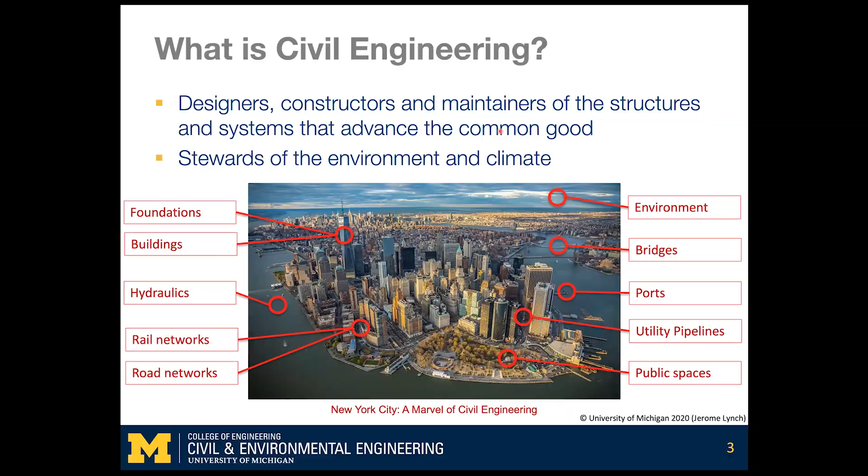Now, the notion of the civil engineer really finds its historical origins in continental Europe in the mid-1700s in the Kingdom of France. During that time period in the history of France, there was a rapid expansion of the national economy, requiring the king to install and invest heavily in transportation assets throughout the kingdom, including rising investments from 1726.

All the way to the eve of the French Revolution in 1789, going from 2 million livres to 25, constructing essentially new masonry bridges, paved roads, among others.

But it's really not until 1747 that we see the establishment of the first school that's designed to train individuals to be civil engineers, specifically engineers in the pursuit of transportation assets, with the establishment of the National School for Bridges and Roads. In the second half of the 18th century, we see the momentum shift to Great Britain.

Where we see the first self-described civil engineer, John Smeaton, who established in 1771 the Smeaton Society of Civil Engineers. That momentum continued into the early 1800s with the establishment of the Institution of Civil Engineers, which was formed in 1818 as the first professional engineering society and actually the first global professional engineering society, with many countries then following the leadership of the ICE.

The ICE really grew under the leadership of Thomas Telford through the 1820s. Now, if we look at the impact that civil engineers have had over the history of all of our nations, we'll see tremendous economic impact in much of our work.

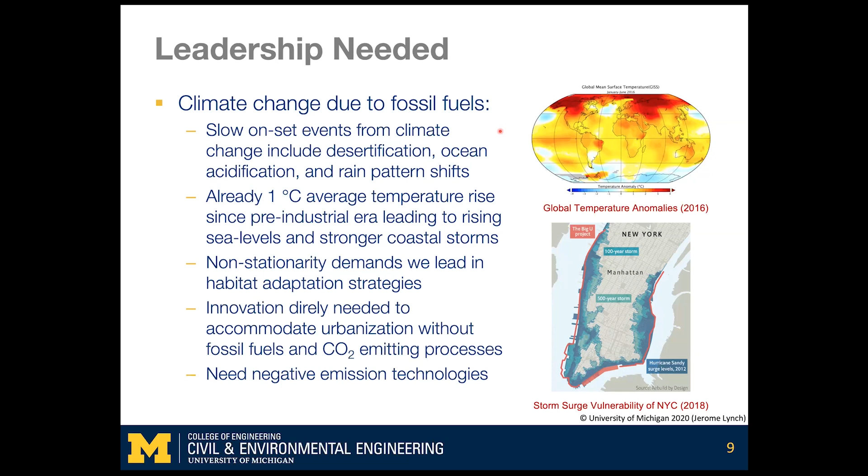We're also likely to play a role in negative emission technologies that will begin to essentially remove carbon from our atmosphere. Another area where leadership is needed is the financial burden of our infrastructure, which continues to grow.

There's also questions around the role of public investment. Currently, public investment, particularly in North America, remains a dominant investment model for funding our infrastructure, but does that remain the best approach? If we were to introduce more private investment in our infrastructure, does that ensure equitable access to the benefits that our infrastructure design provides?

And there's many examples that we see across North America of privatization of infrastructure services associated with private financing behind infrastructure projects. Now, a question must be asked: given these grand challenges, are we positioned as a profession to lead?

One of the challenges that we see going forward is a global commoditization of the profession, leading to tighter profit margins, which adds challenges associated with finding qualified candidates and retaining those candidates within our organizations. Now, while market consolidation of the industry is helping with efficiencies and talent access, one of the challenges we see is a lack of funding in new technologies across the industry.

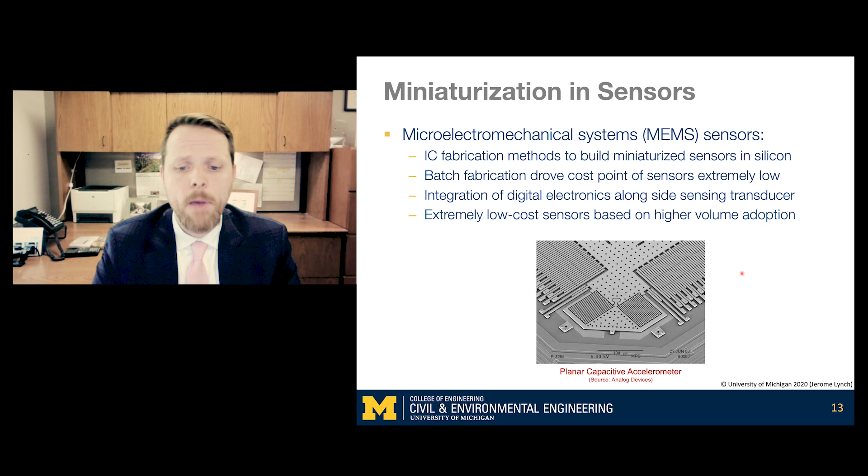One of the first amazing technologies of the 20th century is the miniaturization of sensors, making sensors both miniature as well as low cost. Some of the key technology drivers there that have really driven a new era of sensing technologies is microelectromechanical systems, or MEMS sensors. We see many of these sensors throughout many forms of life, including our cell phones, all the way to infrastructure systems. These technologies have put into reach high density of sensing that we're now beginning to see throughout the built environment.

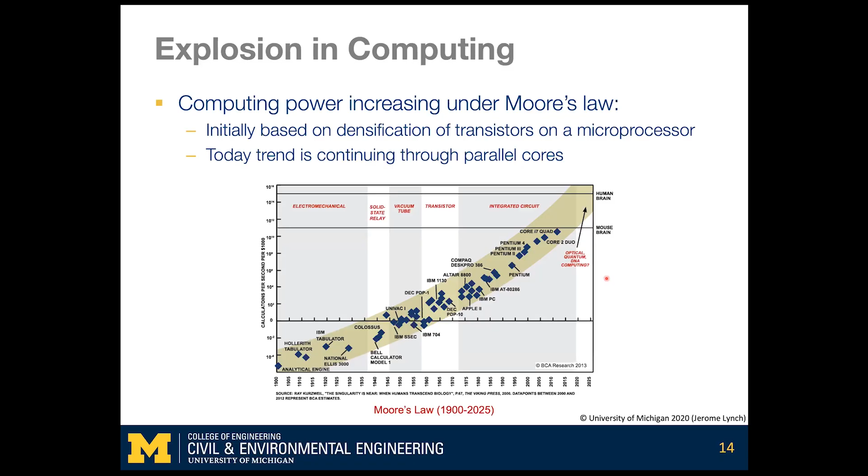Another key technology development is computing power, which has continued to increase under Moore's law. Initially it was based on densification of transistors on a microprocessor, but today that trend continues through the introduction of parallelization within the design of our computational cores.

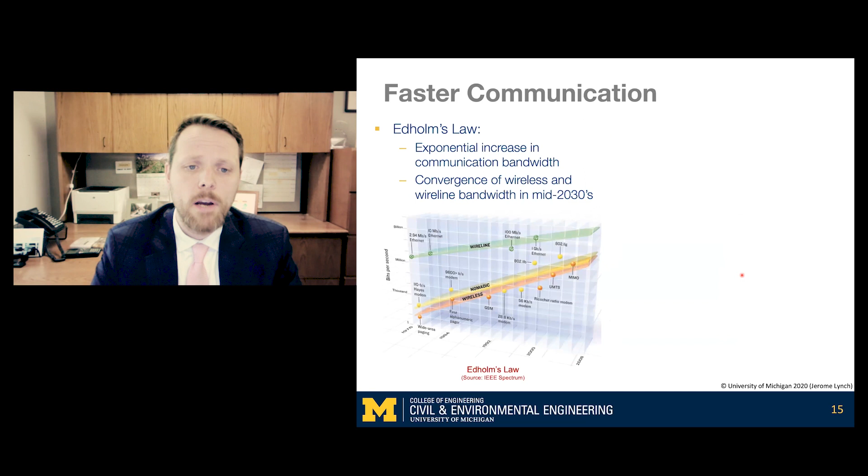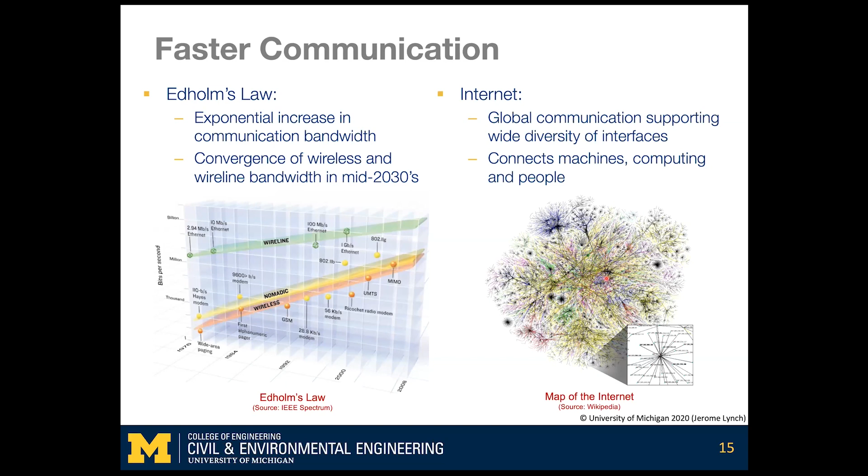We've also seen an explosion in communication technologies, both in the form of Edholm's law, looking at the rapid rate of communication bandwidth associated with wireless communication technologies, where we're seeing convergence of wireless and wireline bandwidths converging by the mid-2030s. Also the internet, which is really a massive global scale communication system that allows for communication between people as well as between devices.

Finally, machine learning has emerged as a very powerful analytical approach for contending with the amount of data that we may be collecting from a sensed world.

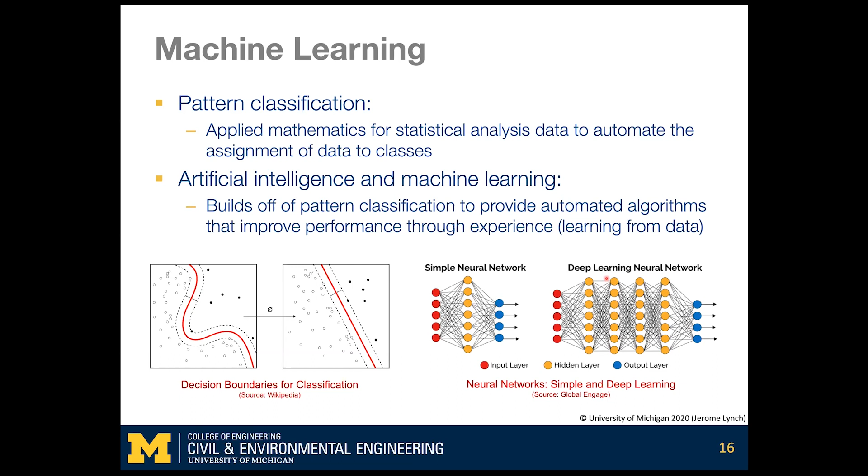First instances of machine learning really find themselves in the field of pattern classification, which is an applied mathematics study of statistical analysis of data to automate the assignment of data to inherent classes, allowing us to classify our world in autonomous ways. That's matured into artificial intelligence and machine learning, which builds off of pattern classification to provide automated algorithms that improve performance through learning, essentially learning from data. There's many examples of that, ranging from artificial neural networks to deep learning convolutional neural networks.

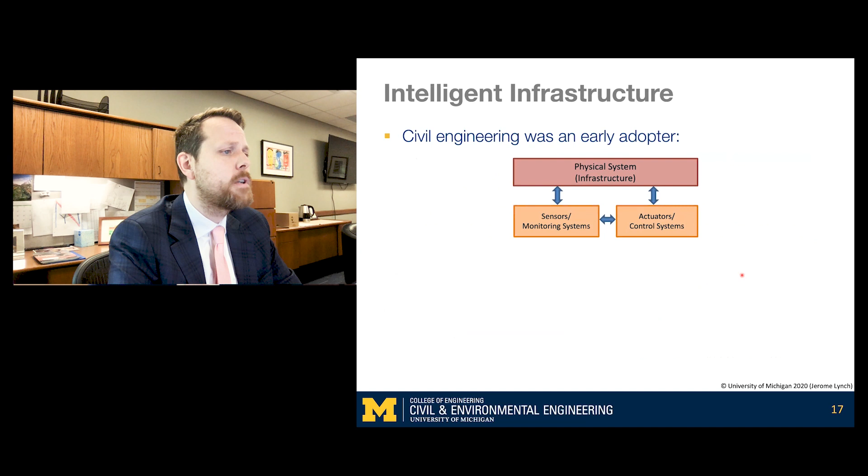Now civil engineering as a profession has always been a technology leader in the adoption of sensing and actuation technologies to automate our infrastructure systems. We see examples of sensors in the form of monitoring systems and actuators in the form of control systems in many civil engineering structures, ranging from marquee structures in areas where natural hazards are concerned, such as our long-span bridges.

On the west coast of the United States, we see permanent seismic monitoring systems, to proactive control systems that can control undesired deflection and motion of structures during seismic and large wind events, such as structures throughout the seismic areas of Asia. You can see examples here from Tokyo of Mori Tower, which has 350 semi-active hydraulic dampers trying to control that structure during moderate strong ground motion and typhoon winds.

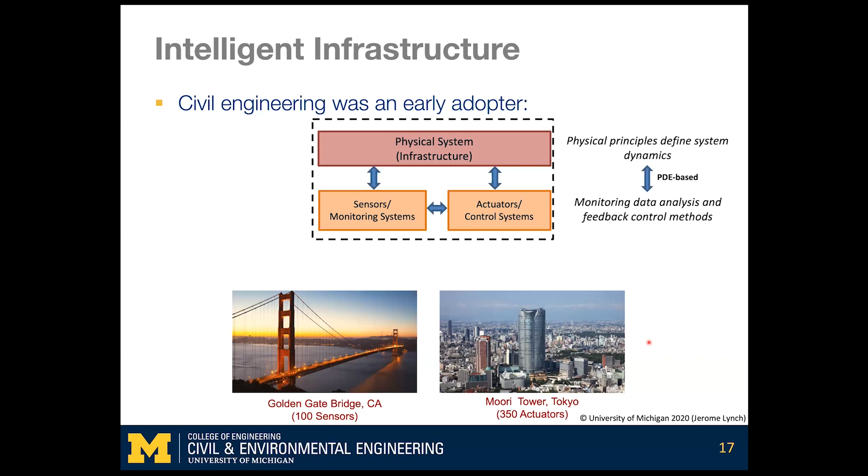But today we're seeing a shift away from the traditional interpretation of data that we may collect in our sensing and actuation systems that have historically been based on partial differential equation type analysis to ones that are based on data-driven methods through the invocation of scalable computing power that's available through the cloud. So communication has made computing on demand available to many of our sensing and control systems, transforming what we can do with data and how that data can enhance the performance of our monitoring and control systems.

This dramatic shift essentially has created a new class of intelligent infrastructure that's often referred to as a cyber-physical system, where the distinguishing characteristic of a cyber-physical system from more traditional intelligent infrastructure is the use of computing power and essentially data-driven analytics to process data we may collect.

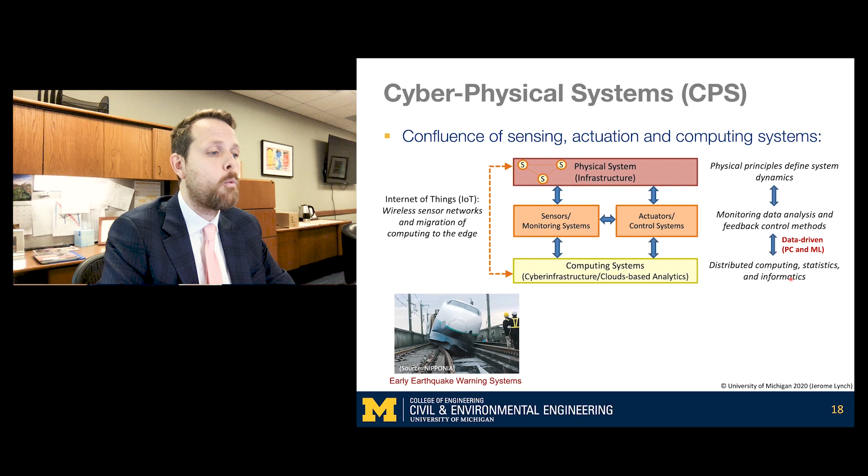There's many examples of these CPS systems throughout our infrastructure systems, including early earthquake warning systems, connected autonomous vehicles, and even the way we inspect our infrastructure through the use of drones and unmanned aerial vehicles that give us access to structures we did not have before.

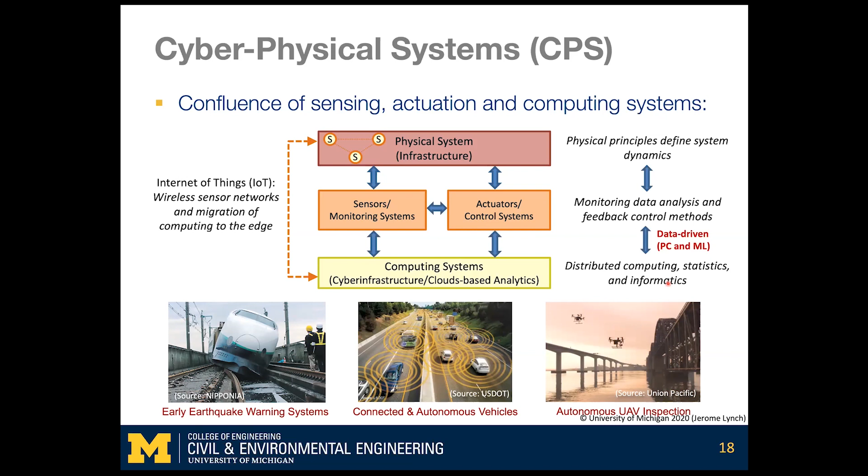Now, the importance of automation cannot be underscored. CPS frameworks are essential for providing solutions for many of the grand challenge problems that I framed at the beginning of the presentation. For example, automation is going to be key in our arsenal of solutions necessary for battling climate change.

Sensing and actuation may be critical to developing adaptive infrastructure systems that truly add resilience to many of our coastal communities. Data-driven assessment based on data collected from CPS systems embedded in our infrastructure will be important in helping us manage aging infrastructure in a risk-informed manner.

Urbanization—we can unlock capacity of many of our built infrastructure systems by enhancing them with cyber-physical system capabilities. We also can increase professional valuation in our talent pipeline by putting automation front and center as a core competency of our profession. But a question must be asked, given the opportunity that these technologies, particularly automation, can play in addressing many of the grand challenge areas that we're being asked to lead,

are we truly in a position of leadership? Let us consider, for example, the area of transportation. Historically, civil engineering has been the designer and manager of our transportation assets and systems. This can include infrastructure assets like bridges and roads, to our signal technologies, all the way to the design and management of our transportation systems, where we look at traffic flow and econometrics.

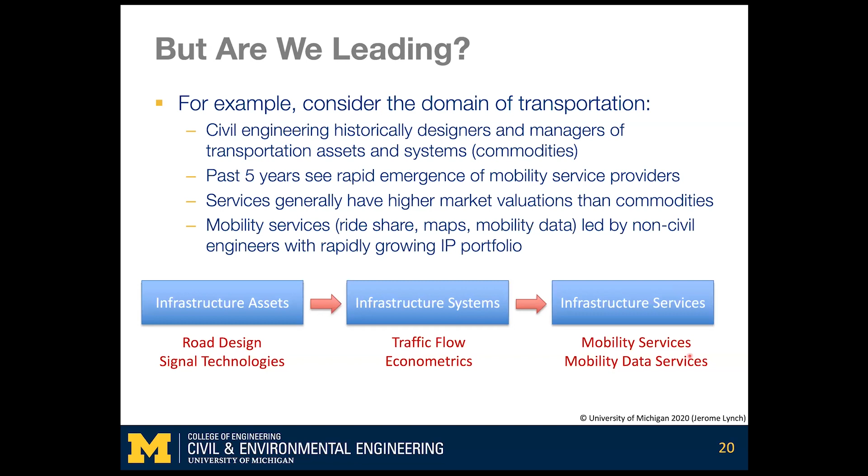Now, these services—including on-demand rideshare, mapping technologies, as well as the collection of data to understand social systems—are generally proven to have higher market valuations than the commodity markets of designing our road assets. So as a profession, we can essentially be more strategic about capturing higher valuation by being the leaders of the infrastructure service space. But one of the challenges we see in infrastructure services is that this particular space is largely being led by individuals with expertise outside of civil engineering.

While these particular businesses have high valuations, they often do not have strong civil engineering leadership at the helm of many of these solution providers. So where do we fit going forward?

So today, infrastructure services are largely being led by the IT sector. They're offering solutions and collecting data, and using and monetizing that data with approaches that often lack transparency. They're also utilizing the data collected by many of these infrastructure services, leading to new forms of private financing for infrastructure projects. And we see that as a dominant financing approach in the smart city space today.

So civil engineering leadership is needed in this space. We need to recognize professionally that it is our domain expertise that's going to extract true value from the data being collected by many of these infrastructure services today.

Not only that, we're uniquely positioned as the engineering profession that really looks at common wealth generation over personal wealth, meaning that we have a role to play in ensuring equitable access to many of these infrastructure services, particularly as we see increasing roles of private financing in this space.

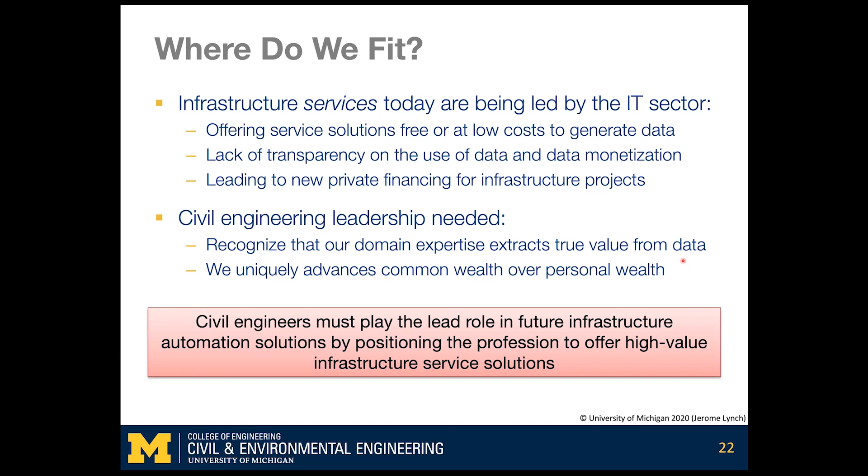In my department at the University of Michigan, the Department of Civil and Environmental Engineering, we've been grappling with many of these issues as an academic community for a number of years, and have recently published a new strategic vision for our department defining what the future role of civil engineers may be in this 21st century. We defined five strategic directions that we truly believe will define our profession going forward.

We feel there's opportunity for us to enhance the experiences of people within our habitats, introducing concepts of social science and public health directly into our portfolio of work.

Also leading in adaptation. While we can hope for mitigation of climate change, I think we have to prepare for that and adapt our habitats to be resilient against climate change.

In order to battle climate change, we have to be thoughtful and innovators in how we shape our resource flows. And we have to leverage new tools and technologies, including automation and smart infrastructure financing, to essentially accelerate the adoption of technologies. So the remainder of my talk today will highlight some of the work we're doing in one of these strategic areas, our automation strategic area, here at the University of Michigan.

The first application I'd like to highlight is one I myself have been involved in, which is looking at the deployment of cyber-physical systems within highway corridors to aggregate data that had not previously been aggregated before, namely data from our infrastructure assets, as well as from the traffic flows that we see on those assets. I'd like to acknowledge collaborators on this work: Kincho Law, Professor of Civil and Environmental Engineering at Stanford, and Dr. Mohammed Ettouney, Principal Emeritus at Thornton Tomasetti, formerly Weidlinger Associates.

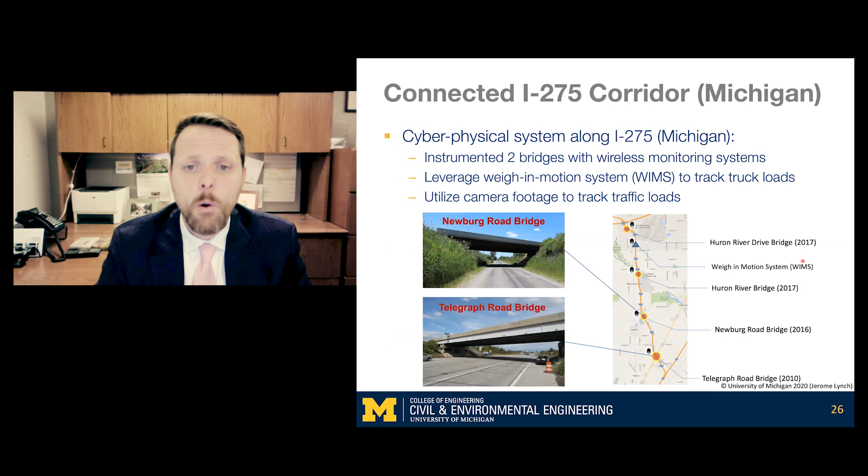We've been designing cyber-physical systems that have been deployed on an operational highway corridor here in the state of Michigan, known as the Interstate 275 corridor, which is a 20-mile corridor from the Michigan-Ohio border at Toledo all the way up to the Detroit metropolitan area.

We've instrumented a number of bridges along this particular corridor with permanent wireless structural health monitoring systems. Two of the bridges that I'll highlight today are the Telegraph Road Bridge and the Newburg Road Bridge.

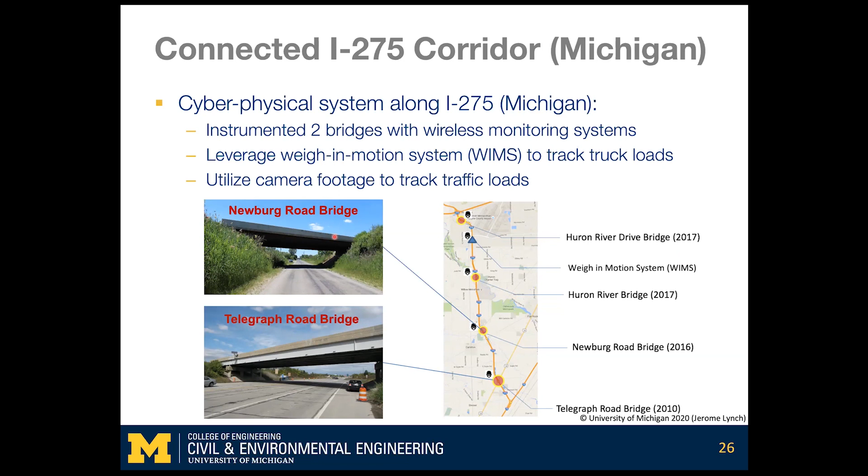We've also integrated into that cyber-physical system traffic cameras to understand traffic loads and weigh-in-motion stations to measure the loads on our infrastructure assets. The two bridges that are instrumented are the Telegraph Road Bridge and the Newburg Road Bridge.

These are 40-year-old bridges. They're very standard steel deck girder bridges that are widely used in the United States. This represents an opportunity for us to look at how to cost-effectively deploy structural health monitoring technologies and cyber-physical systems to manage what is, here in North America, a dominant bridge type within our national inventory of bridges.

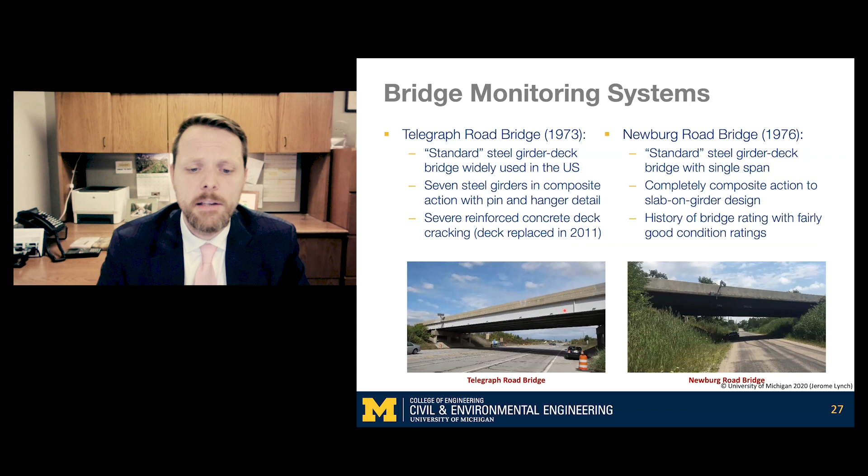Both of these bridges have experienced some form of deterioration over their lifespan, but in particular, the Telegraph Road Bridge had its deck replaced in 2011 due to poor deck conditions, which is not uncommon in these parts of the United States where we have harsh winters and widely use de-icing salts on our roads.

We've deployed on both of these bridges permanent monitoring systems using a network of wireless sensor nodes called Narada sensor nodes. These sensor nodes were developed more than 15 years ago here at the University of Michigan, but have been deployed on more than 24 structures worldwide.

You'll see here two examples of these monitoring systems. These are essentially solar-powered wireless sensor nodes that are deployed on our bridges to collect data from a variety of sensors, ranging from strain gauges all the way to accelerometers and thermocouples.

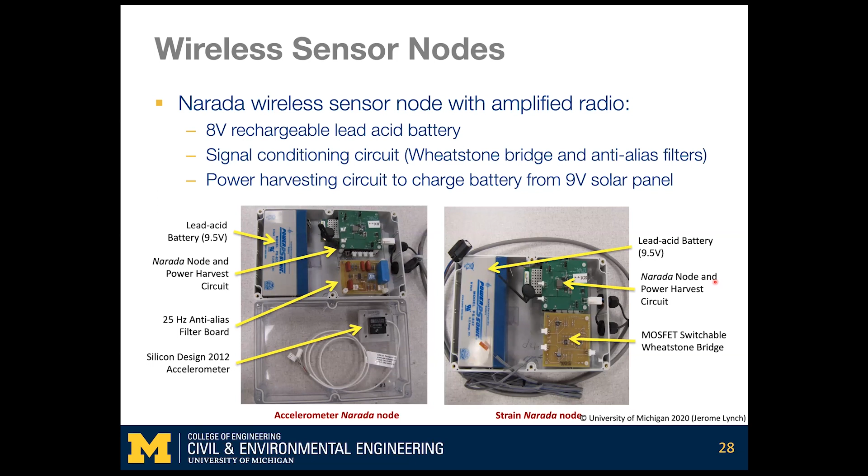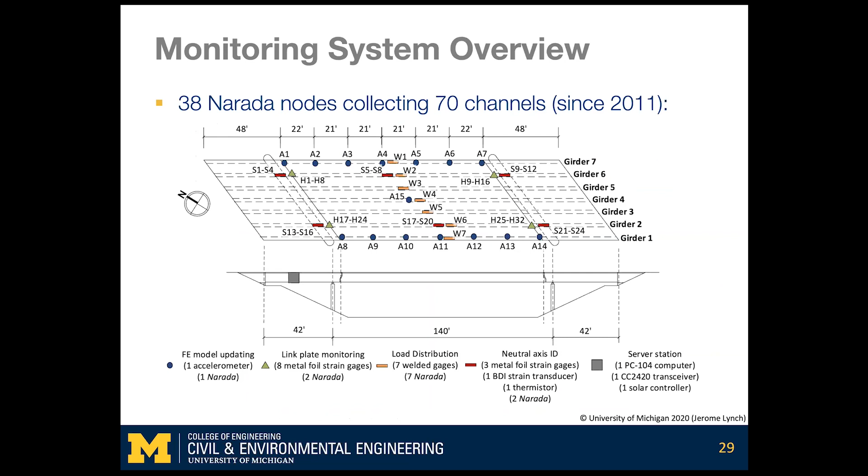On the first bridge, the Telegraph Road Bridge, we have deployed 38 sensor nodes collecting over 70 channels, and we've been collecting data from this bridge since 2011. So we're approaching nearly a decade of performance data that's been collected from this particular bridge nonstop.

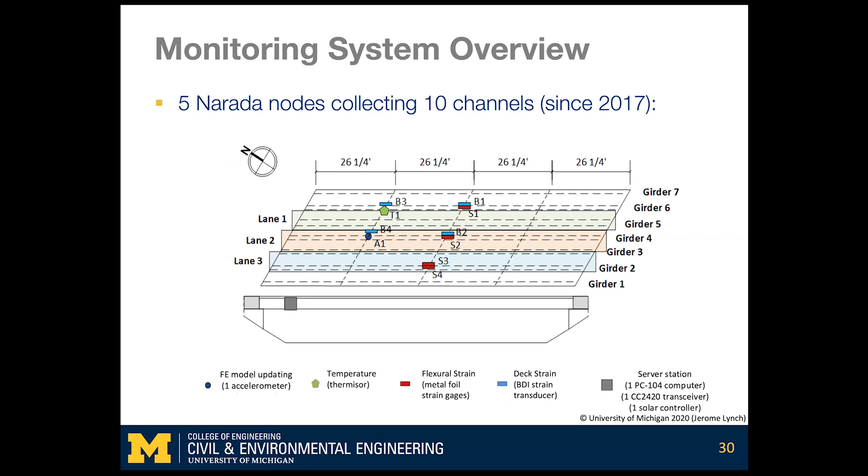Also, the Newburg Road Bridge has a lighter monitoring system on it, with only 10 sensing channels collected by 5 sensing nodes, and this bridge has been monitored since 2017. I'll highlight some of the data from these bridges shortly.

In addition to monitoring the bridges, one of the aims of our cyber-physical system is really to understand what the imposed load is on these particular bridge structures, so that we can correlate bridge responses and long-term deterioration with the actual physical vehicle loads that these bridges are seeing day in, day out.

Towards that end, we have a weigh-in-motion system on that corridor. This is roughly 15 miles north of the Telegraph Road Bridge.

So these weigh-in-motion stations are not co-located with the bridges, but nonetheless provide rich data on the trucks we're seeing in those corridors, including their speed, the number of axles, and the distribution of weights on their axles.

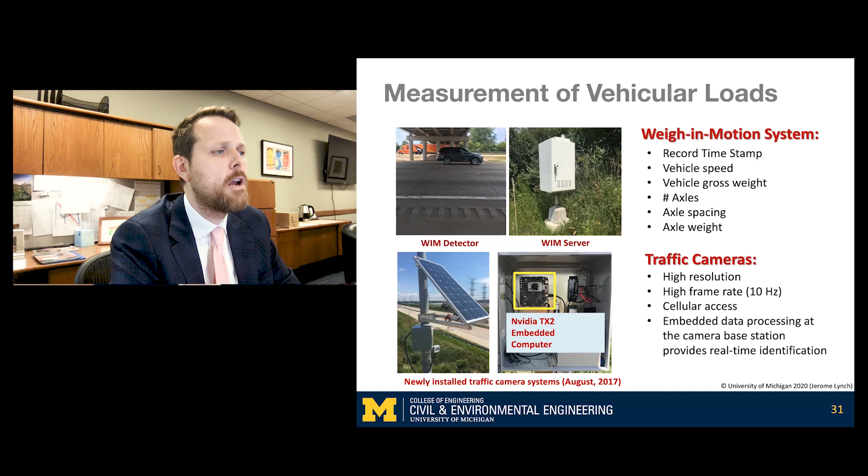In order to combine data from the weigh-in-motion station to the bridges that are further upstream, many miles away, we use computer vision, where we've deployed traffic cameras along the roadside of this corridor to essentially in real time track traffic and then use embedded deep learned detectors to detect trucks and truck events and use our cyber-physical system to communicate those truck events throughout that system.

Now, in the first few years of deployment of these bridge monitoring systems, we largely collected data from these solar-powered sensors on a schedule-based process. So from 2011 to 2016, we scheduled data collection every 4 hours for a few minutes.

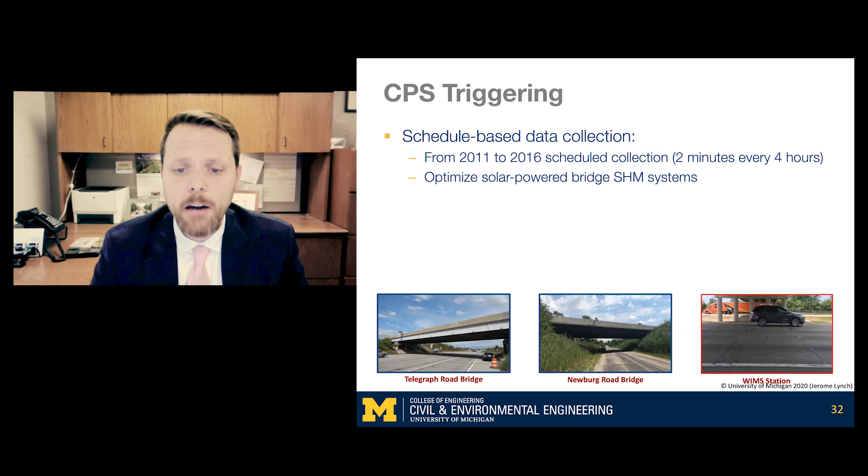If we saw traffic loads on the structure, then we collected the response. But if there was no traffic load, then we would not see measurable behavior of those structures, but we would collect that data. This was necessary to optimize the performance of the monitoring system, which is a solar-powered system. So we do not have unlimited energy, but we need to be very strategic in the deployment of that energy.

Now, the aim, though, is not to just collect data from the response of those bridges, but we're more specifically interested in the response of those bridges to heavy truck loads, which are the known loads to deteriorate those structures. So we use a cyber-physical system and the communication across the internet between our cameras, our bridge monitoring systems, and our weigh-in-motion station to essentially automate the detection of trucks and then to trigger data collection based on the truck events we see moving in the corridor.

In doing so, we can, for the first time, link the actual measured truck load measured at the WIM station with the bridge responses we see down at the bridges and begin to look at correlated relationships between bridge behavior due to the same set of truck loads.

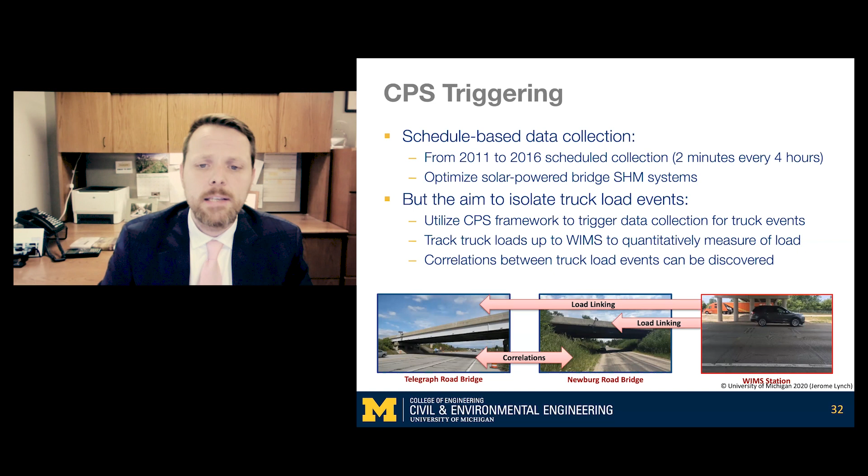In order to do that, we have embedded a number of off-the-shelf computer vision algorithms that are based on deep learning methods. Namely, we have a single-stage detector that's based on a convolutional neural network architecture. It's often referred to as YOLO, which was introduced by Redmon et al. in 2015. It's a very high-speed detector that, once trained, gives us high levels of accuracy and precision in the detection of trucks.

We have a tiny version of this embedded directly in a GPU that sits roadside with our cameras, allowing us to, once trained, essentially automate the detection of trucks in real time at the detection rate that's equivalent to the frame rate of our cameras, which is at roughly 10 Hertz.

We also then have to perform re-identification. It's one thing to detect trucks at each of the camera locations, but we need to then be able to say that the truck we see at one bridge is the same truck we see at the other bridge or at the weigh-in-motion station. So there we're using triplet networks to solve the re-identification problem, again built on YOLO version 3 Tiny.

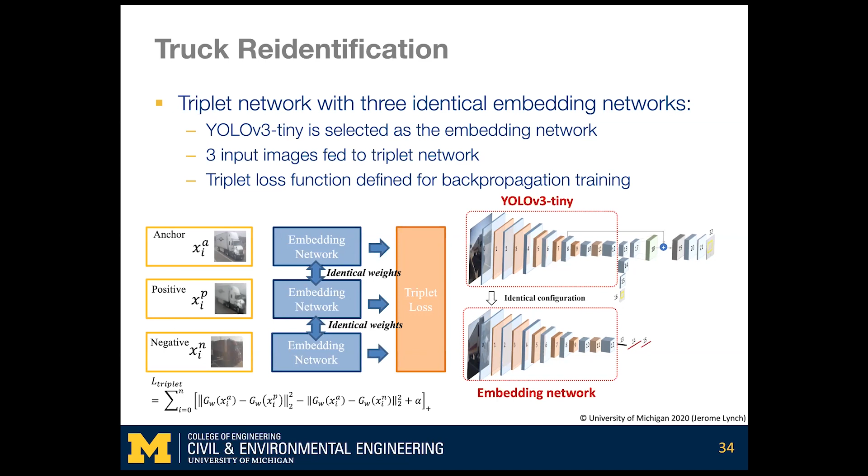That essentially looks at using YOLO version 3 as an embedding network and looking at loss functions that are based on whether an image or a detected object is the same object seen in other images fed into that detecting network. Now, the result of that is that we have a cyber-physical system that can automate the tracking of heavy trucks.

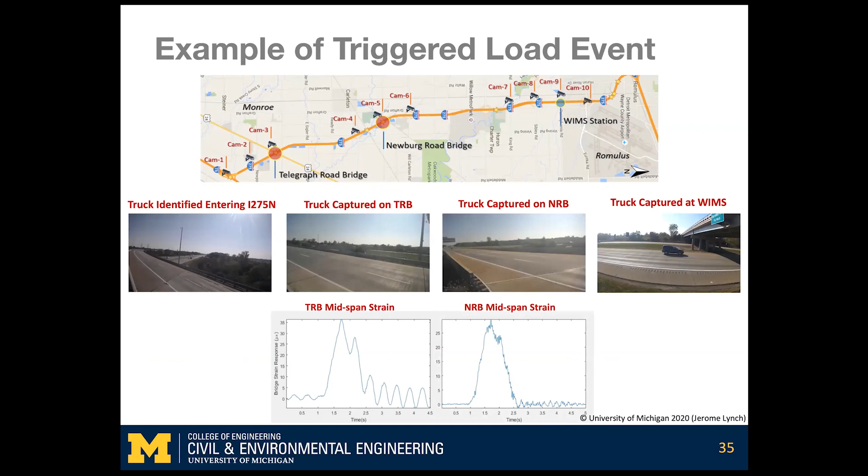As you'll see here in these animations, where we can detect the truck once it comes onto the I-275 corridor and essentially alert our bridge monitoring systems to capture those events, and then finally see that truck event at the weigh-in-motion station.

The end result is that we have one of the first ever data sets that actually has a measure of the truck load, essentially the gross vehicle weight and the axle weights distributed on the axle spacings that have been measured by our weigh-in-motion station, allowing us now to explicitly link the measurement of the truck load to the measured bridge responses we see within the corridor.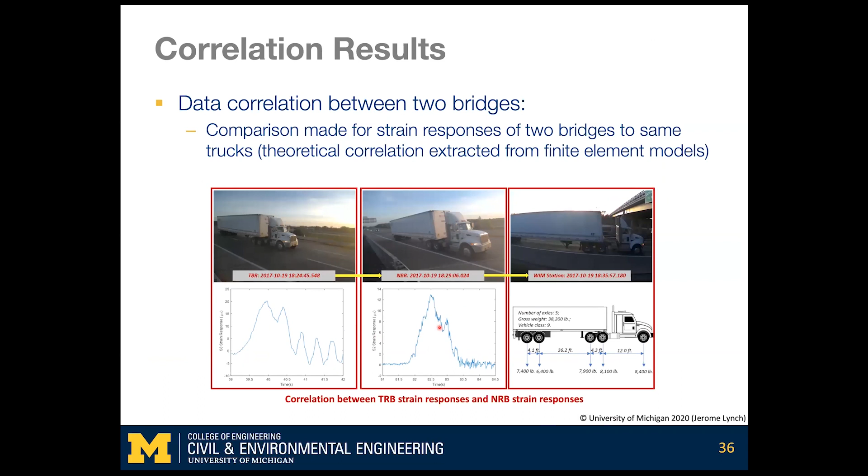One of the applications that we've been exploring with the use of the data is looking at relationships in the response of our structures to the population of truck loads.

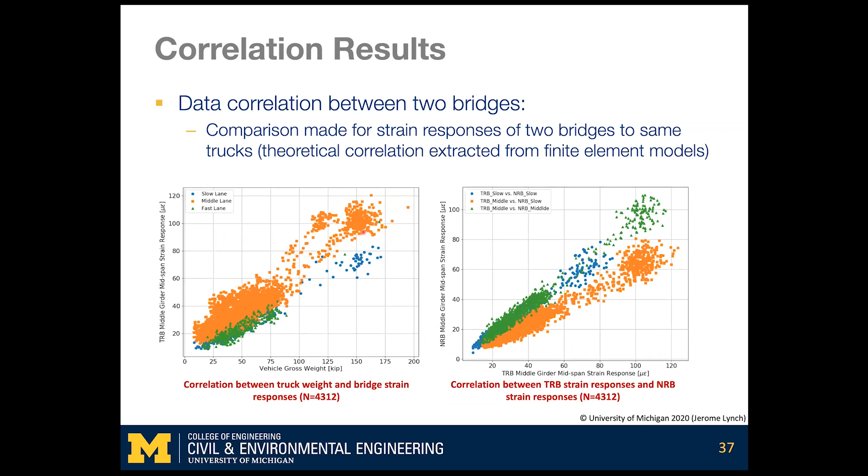These scatter plots correspond to the peak responses at different bridges against the gross vehicle weight, depending on the lane assignment of the truck. We look at the correlation of peak responses at two bridges, the Telegraph Road Bridge and the Newburgh Road Bridge, using these as baseline models to establish normal, healthy behavior, and trying to use these correlated relationships to detect anomalous behavior in deteriorated bridges within a population of measured bridges in the cyber-physical system framework.

One application we've applied that cyber-physical system to, in partnership with our partner the Michigan Department of Transportation, is using these long-term monitoring data sets to answer the question of durability of the structure. So instead of thinking of this as a structural health monitoring problem, we think of it more as a structural durability monitoring problem, looking at the durability of the decks.

The Telegraph Road Bridge has a long history of deck deterioration, as you'll see here, on both its wingspans as well as its main span. A key attribute of this bridge is that its main span is supported by hanger plates using a pin and hanger connection off of two wingspans on the north and south ends of the bridge.

What we observed before deck replacement in 2010 was that the center span, which is in full composite action, has almost no deterioration of the deck, a deck in very good structural condition. But the wingspans have essentially spalled areas and potholes associated with poor deck durability. A key functional attribute of those wingspans is that they do not use shear studs and are in non-composite action.

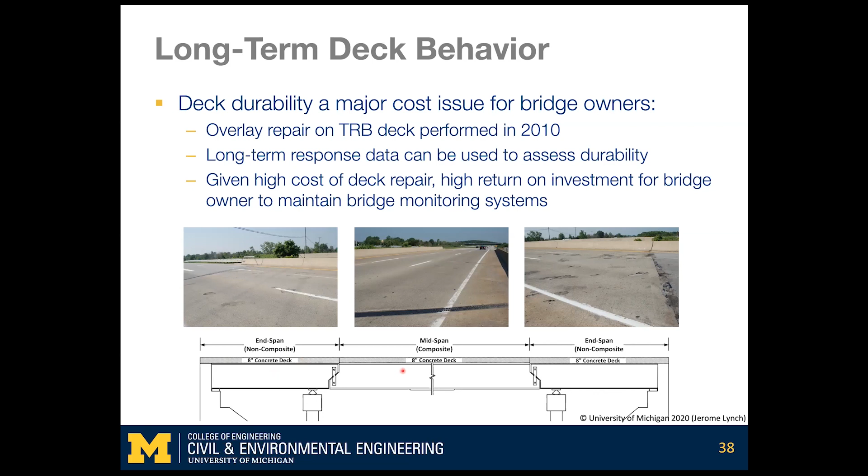Part of our sensing strategy, knowing that one of our end goals was to study the durability challenges that this bridge owner has seen on this bridge, was to deploy our sensors in an array that allows us to look at the flexural behavior of those bridge spans.

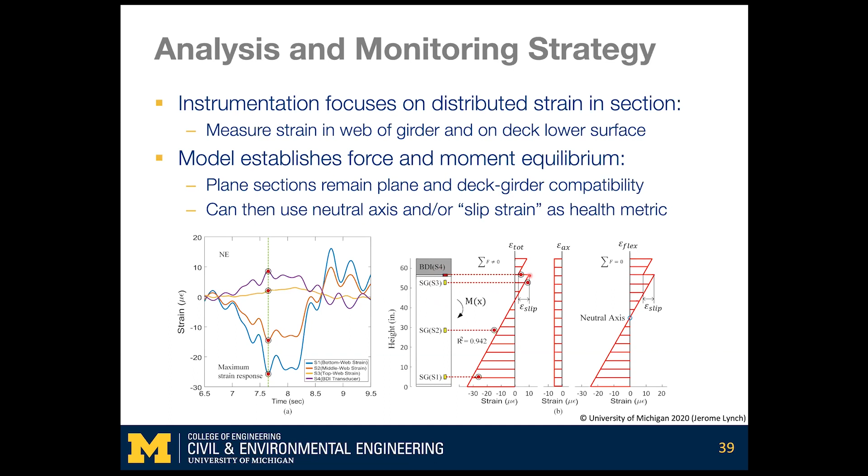We have on those bridges strain gauges through the height of the steel girders, as well as a bridge diagnostic intelliducer, which is like a full-gauge strain gauge within the deck, allowing us to look at the flexural response of the structure under vehicle loading, specifically at the interface between the concrete deck and the steel girder, looking at neutral axis location and slip strain as health metrics that describe the durability challenges of that bridge.

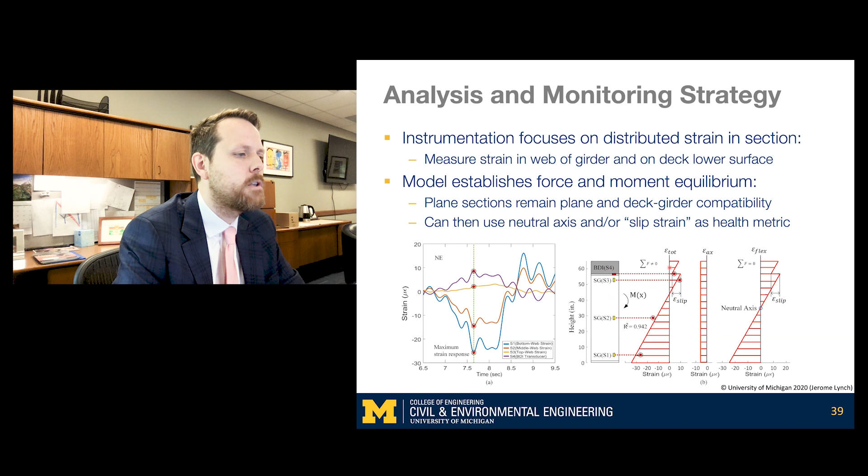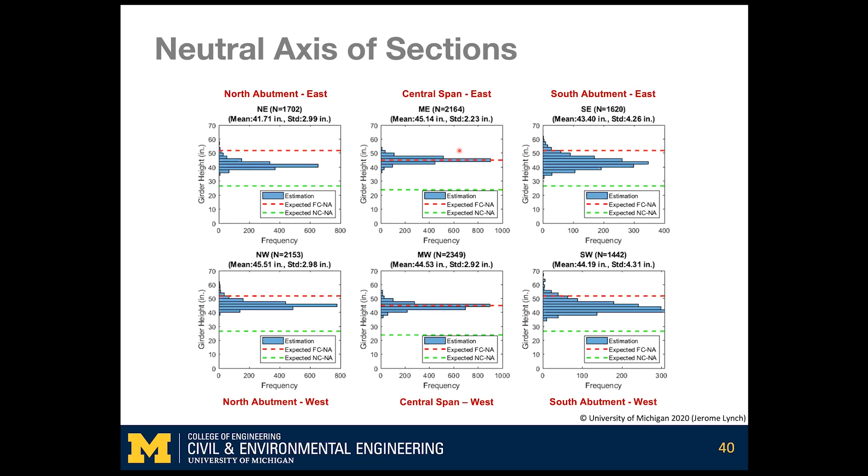In the center span, where we are in composite action, we see essentially perfect neutral axis location associated with the flexural response of that span under truck loads, attesting to the integrity of the composite action that's intended through the introduction of shear studs at the steel girder-concrete slab interface.

We've used the data to take measurements of the gross vehicle weights exciting our structure, and looking at the strain difference, or what we call slip strain, at the interface between the concrete deck and the steel girder in the non-composite area, to model the nonlinear behavior of partial composite action that exists based on chemical bonding and surface friction between the concrete slab and the steel girder.

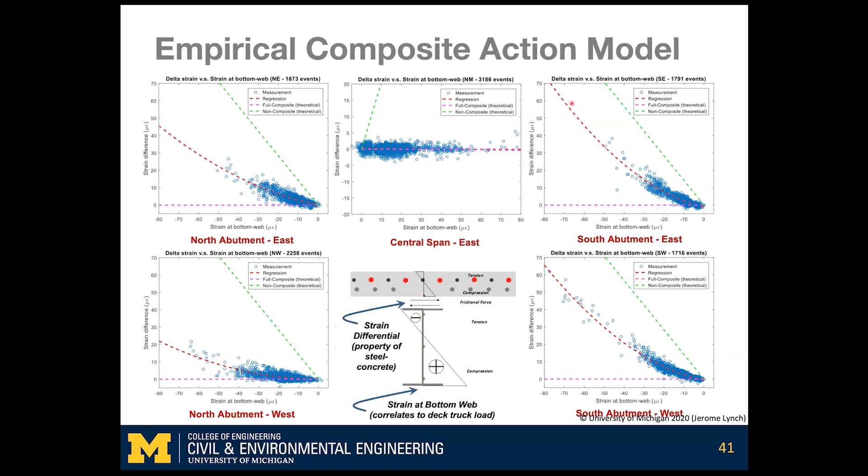So long-term monitoring data has unraveled empirically derived composite action models of partial composite action in these non-compositely designed steel girder slab spans. We've applied those models to studies on the durability of those structures, looking at the implications of these nonlinear partial composite models, and at the assumptions of the designer, who back in the early 1970s, based on AASHTO code, would have assumed no composite action, meaning the negative moment area would have put larger degrees of tensile strain on that deck due to the partial composite action we're observing based on our data.

And that's allowed us to look at the durability of these particular wingspans.

A second application of cyber-physical systems deployed in the civil infrastructure space are stormwater systems, essentially making them smart. This work is that of my colleague, Professor Branko Kerkez here at the University of Michigan. Stormwater systems are critical infrastructure systems used to collect rainwater during storm events and bring it out to natural bodies of water.

That's often done through the use of wastewater systems, where we have the challenge of combined sewer overflows due to very large storm events. Here in the Great Lakes region, this is a major issue for ensuring water quality. We have over 184 communities with combined sewer overflow systems, where each year we see between 1,200 to 1,500 overflow events going out into the Great Lakes area. This is equivalent to upwards of 20 billion gallons of untreated wastewater spilling out into the Great Lakes.

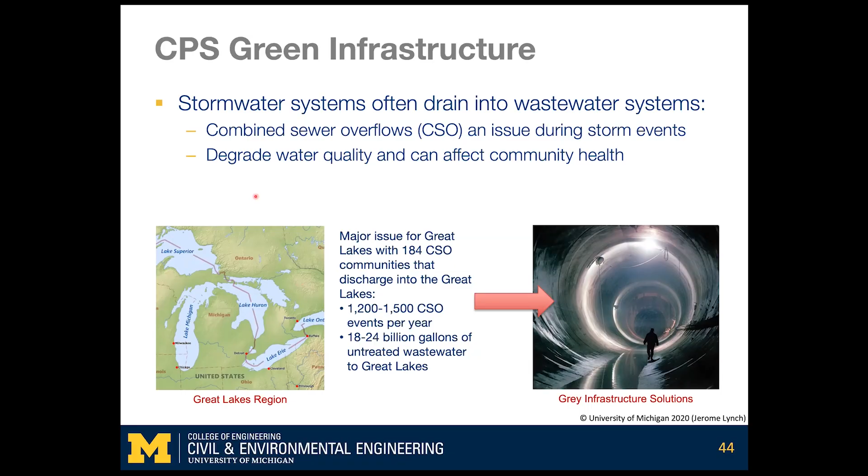How do you solve this issue, particularly under the demands of climate change? One approach is to deploy gray infrastructure solutions, which are very costly and take time to deploy.

This climate change requires us to react more quickly and more nimbly in solving a lot of these stormwater events with respect to the performance of our stormwater infrastructure.

A solution is to utilize green infrastructure, which offers exciting possibilities to provide a solution that's much lower cost but much more environmentally responsible. In addition to solving demand issues on our stormwater systems, it improves water quality by lowering sediment and utilizing retention time within the natural environment before those water flows come out to larger natural bodies of water like lakes and rivers.

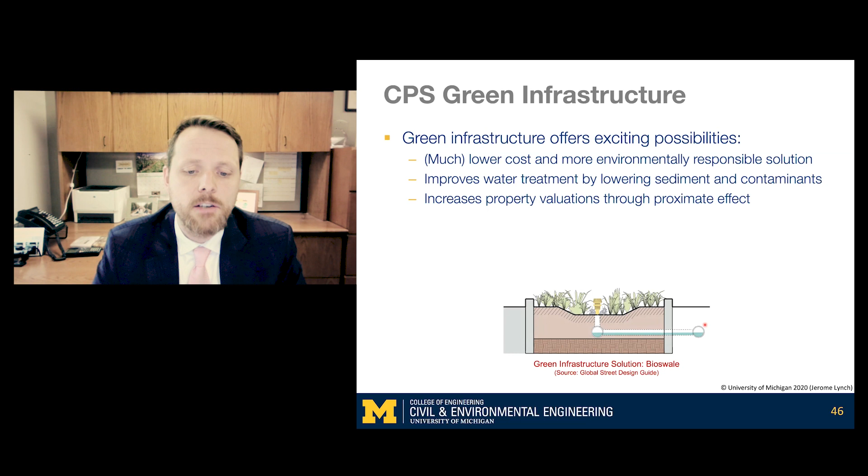Green infrastructure is also known to revitalize urban areas by increasing property valuations through a proximate effect for properties in close proximity to it. Shown here is an example of one green infrastructure solution which ties to our critical stormwater systems by providing more natural settings for water retention.

Now, most green infrastructure systems are passive approaches. You design it and it performs as designed. But the question is, can we greatly enhance the performance of green infrastructure through cyber-physical systems?

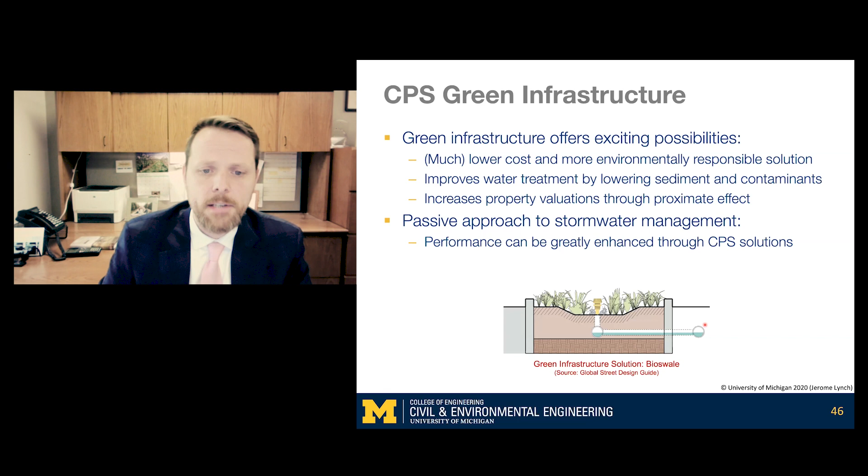The work of Professor Kerkez looks at the deployment of wireless sensors and actuators that are cloud connected to the internet, which can monitor in real time storm events and the flow of water within our urban and natural settings, then process that data in real time to formulate control solutions that can control the flow of stormwater within our habitat areas, thereby greatly enhancing the performance of our green infrastructure systems.

The concept is quite simple. In traditional infrastructure systems used for stormwater management, a storm event occurs spatially over a regional area of your community. This passively feeds into your stormwater system, which, if the storm event is large enough, will exceed the capacity of that system, leading to floods and overflows of raw sewage into natural water bodies.

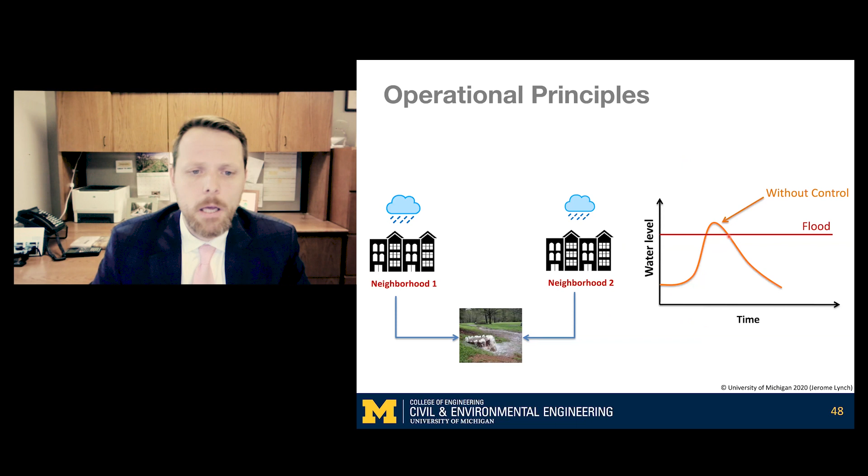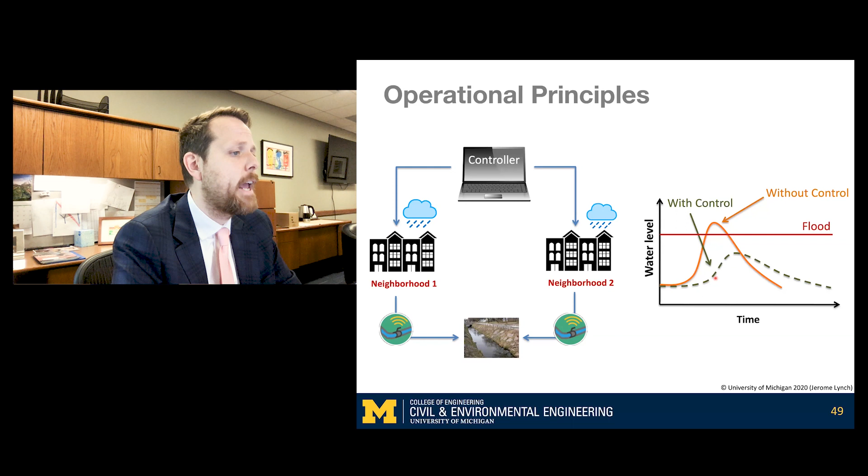The idea is to introduce monitoring and controls with a cloud-based controller to move the movement of water in time and space, alleviating the demand on gray infrastructure systems. This is done through control and monitoring using green infrastructure whose performance has been greatly enhanced by these embedded controllers and sensors.

He can also control valves and gates to essentially control the flow of water within these watersheds. Shown here is one deployed watershed that he's instrumented.

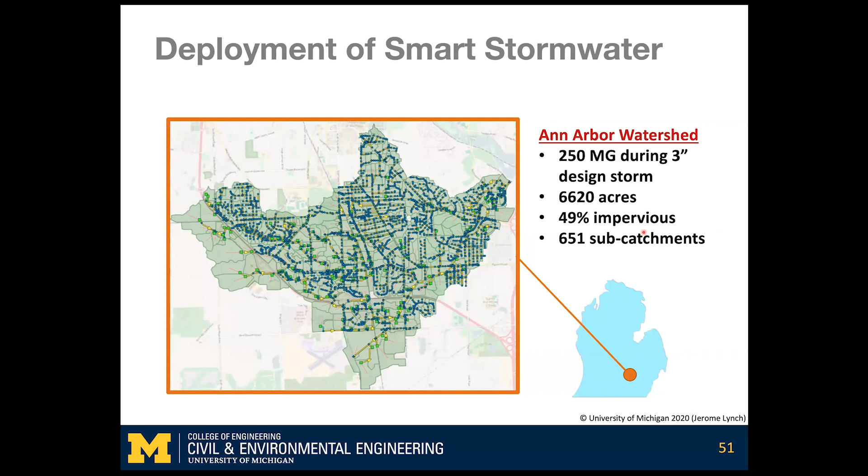He's instrumented about 5 watersheds, 4 of which are here in the state of Michigan. He's managing nearly over 500 sensor nodes across the state. Here in Ann Arbor, he has a fully instrumented network that's essentially a catch basin to the Huron River, constituting over 6,600 acres of land, 49% of which is impervious. It's an urban watershed with over 651 subcatchments.

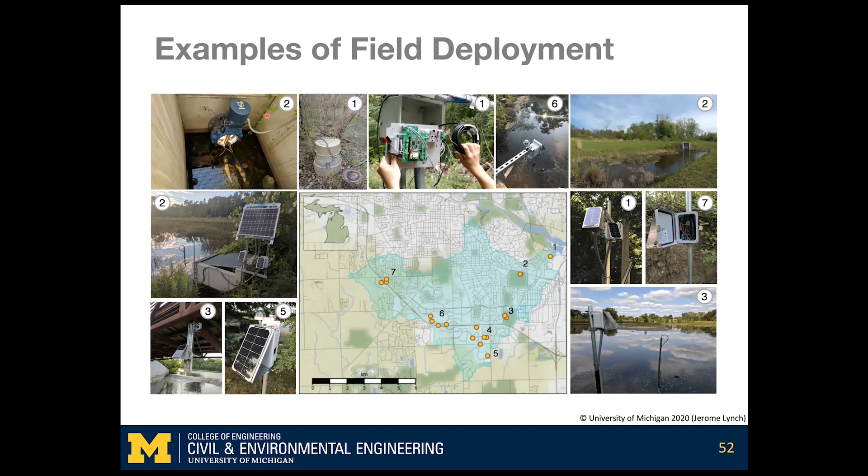He's deployed throughout this urban watershed in Ann Arbor both sensor nodes to measure rain levels as well as water levels within natural bodies, including rivers, reservoirs, and ponds. He's also installed valves that are fully actuated based on commands coming in from the cloud from his cyber-physical system, to control the flow of water within the watershed.

Shown here is an example of one of these cloud-controlled valves that uses wireless telemetry to be actuated. Here is a retention pond in one area of the city used as part of a larger green infrastructure system. This retention pond is about 2 miles upstream of a natural pond or wetland area that's integral to the operation of this urban watershed in Ann Arbor. He uses this valve to control the retention time of water within this pond before it enters the green infrastructure system.

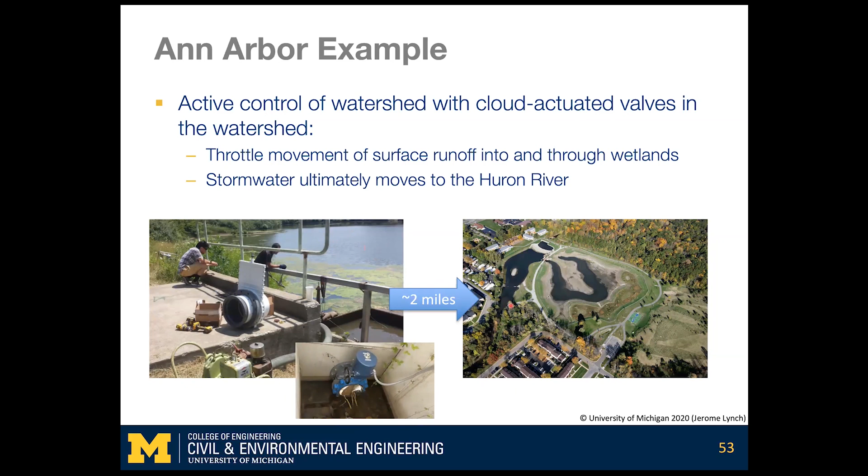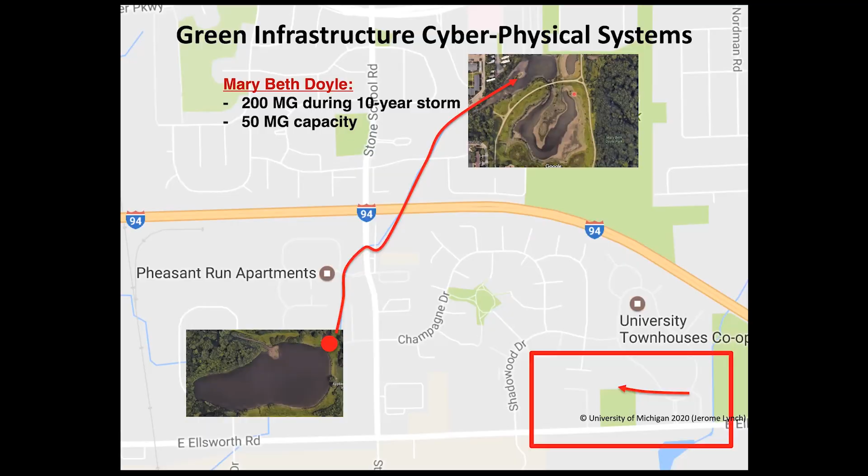During a storm event, water flows through the impervious surfaces of the built areas of the city until it comes into this pond area, where he actuates a valve to control flow down into a creek that feeds into the Mary Beth Doyle Park area, which has a retention pond for treatment of the water and controlling its flow before it moves on to the Huron River.

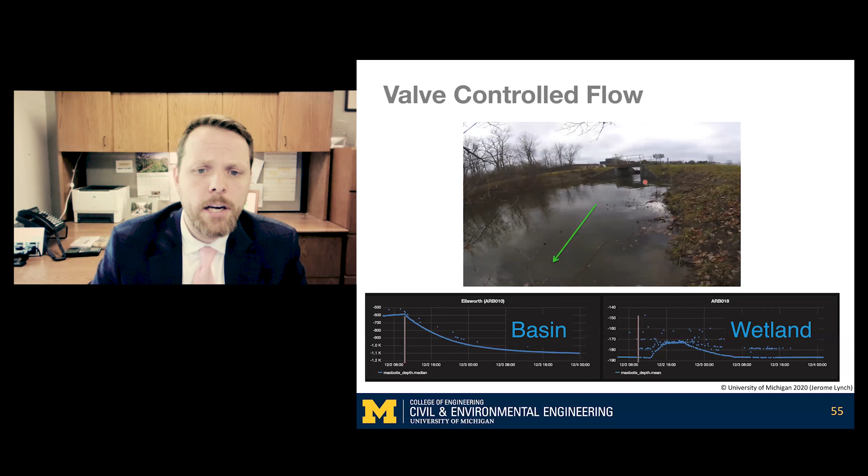Shown here is an example of the use of the catch basin that is actuated. You'll see the flow and then the release of that flow animated based on actuated commands on his cloud-actuated valve. Shown here downstream in that wetland area, once the valve has been opened, is an increasing level within these retention areas of the green infrastructure in the Mary Beth Doyle Park area of the city.

Now, the impact of this work is: before deploying this automated watershed for stormwater management, this system was required to handle 15 million gallons of storage, roughly at $22 per gallon. This is associated with the gray infrastructure for stormwater management in the city, where you would have a total load of 600 pounds per year of total phosphorus within that water.

After introducing his cyber-physical system solution to stormwater management, we see a 50% increase in the capacity of the system, where it's now able to retain up to 22.5 million gallons, and actually sediment over 800 pounds per year of total phosphorus within natural settings before going into our natural bodies of water. This has been estimated, as Professor Kerkez is deploying these systems statewide in Michigan, to be saving the city over $1 million of infrastructure alone, just based on this one cloud-based actuated stormwater watershed solution.

The third and final example I'd like to highlight is the work of Professor Gabor Orosz, who's jointly appointed between civil and environmental engineering and mechanical engineering, and is looking at improving safety and energy efficiency within our transportation networks through connectivity. Connectivity within our transportation networks is rolling out across the entirety of the United States, largely driven by a desire to enhance the safety of our transportation networks.

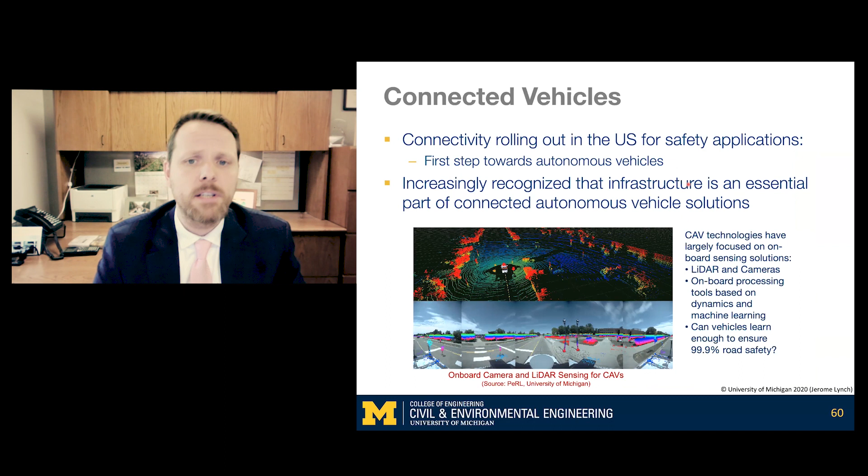Connectivity is also seen as the first step toward autonomous vehicles. But it's increasingly recognized, as car manufacturers grapple with the challenges of fully autonomous vehicles, that infrastructure has a very large role to play in safely automating autonomous vehicles within our roads.

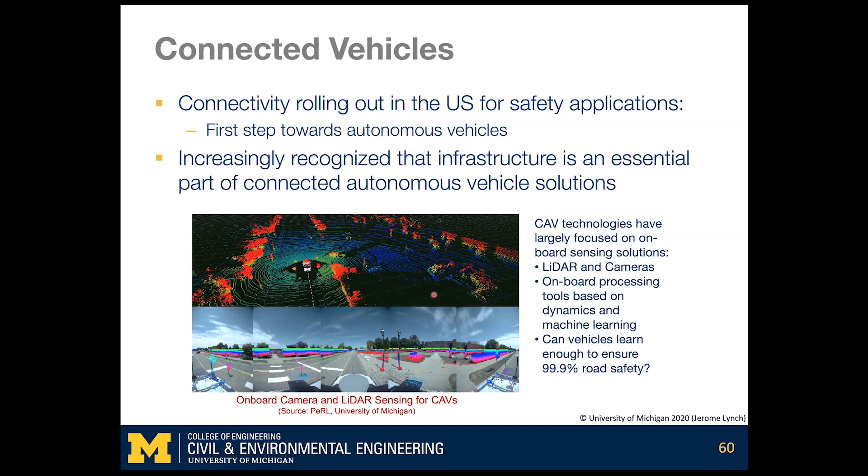What they're observing is that the machine learning algorithms associated with LiDAR and camera imagery, intended to give full situational awareness of vehicles, are not able to mature fast enough to a level that ensures safety on many of these autonomous vehicles. This requires a rethink of the role infrastructure is going to play in supporting these autonomous vehicles, to achieve the levels of safety necessary for wide-scale market adoption of full autonomy in our transportation network.

Here at the University of Michigan, we have an academic industry partnership called MCity, which involves industry partners from both automotive companies, our Michigan Department of Transportation, as well as high-tech companies, essentially looking at the state-of-the-art in both connected vehicles as well as connected infrastructure necessary to realize fully autonomous transportation networks here in the United States. As part of our enterprise, we have a 32-acre test facility called the MCity Test Track.

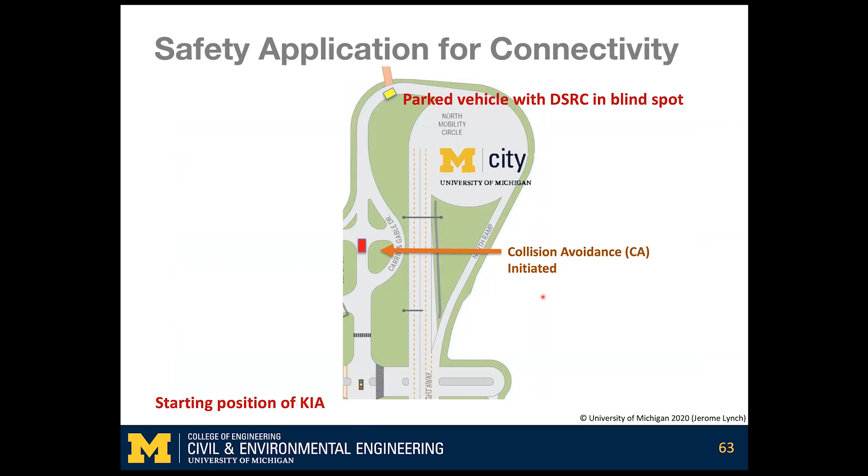Now, one of the challenges with connected vehicles, and the reason why connectivity is a critical piece, is that there's many safety applications that are called non-line of sight safety applications. One particular area that connectivity is playing a major role is in collision avoidance systems, essentially detecting vehicles well before the driver can see them, alerting the driver to enhance the safety and reactive actions that driver will take.

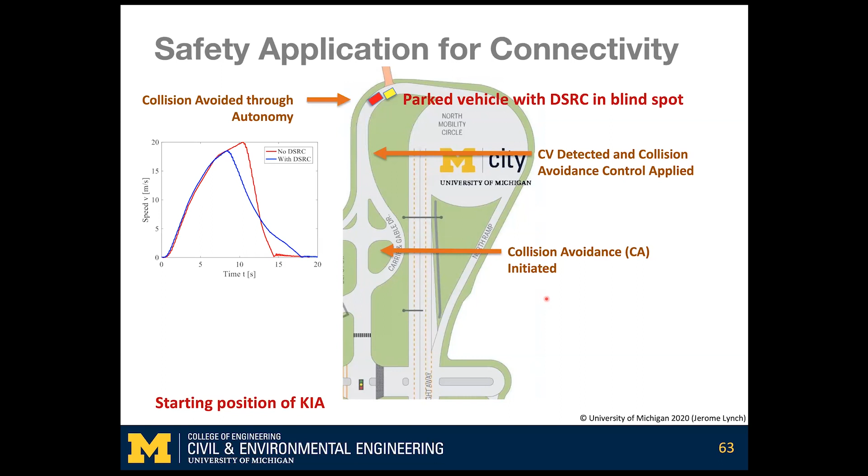So he's been looking at connectivity based on enhancing safety applications on our roads, and you can see an example shown here where he can utilize connectivity to more gracefully slow down a vehicle before encountering a vehicle that's essentially in a road blind spot.

And you can see a video of this with an autonomous vehicle that Professor Orosz has developed in his lab, where it's detecting a parked or hidden vehicle on the road, seeing that before the driver sees it, and autonomously slowing that vehicle to ensure it does not rear end the parked vehicle.

Now, one of the exciting aspects of connectivity in the deployments that we've been deploying here at the University of Michigan is that we can begin to unravel the behavior of humans within a connected autonomous transportation network. So some of the work that Professor Orosz has been doing is looking at true human subject data associated with how humans drive vehicles and how they react to events on the road, as we try to model human behavior in both fully autonomous vehicles as well as connected but not autonomous vehicles that may be on the road.

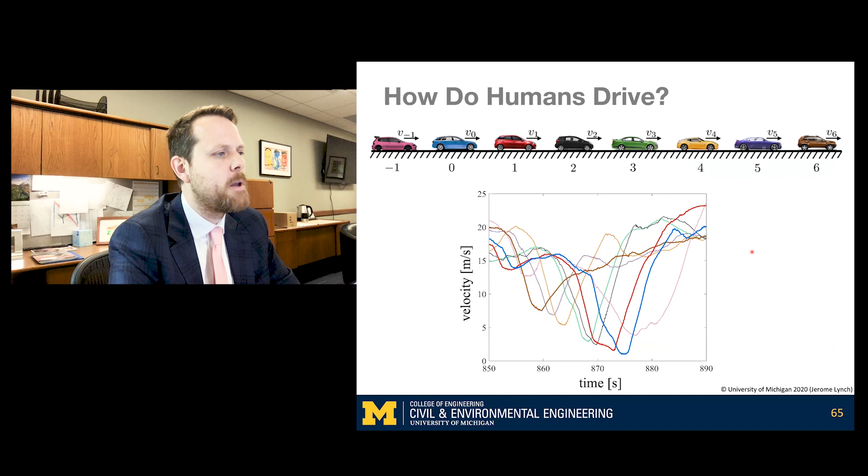Shown here is a platoon of vehicles that he deploys with connectivity to collect empirical data on the behavior of those drivers under different road conditions, both in time and space. And shown here is the braking of vehicles as you have a car slowing down ahead of you, how vehicles behind that car begin to react. So this is human subject data on how human subjects drive their vehicles.

That's informing the classical car follower model. This is actually a very classical dynamic model that describes human behavior behind the wheel with respect to the spacing between two consecutive vehicles. So as the gap h between vehicles begins to close, human subjects would naturally begin to slow down or press the brakes on the vehicle.

We can use the data we're collecting from our connected autonomous vehicles to inform empirically tuning factors associated with the behavior of these models, essentially looking at these weighting factors alpha and beta associated with the behavior of drivers as they try to decelerate the car based on closing distance between the vehicle and the associated relative velocities between those vehicles. So we use empirical data to inform models that are going to model the behavior of human subjects.

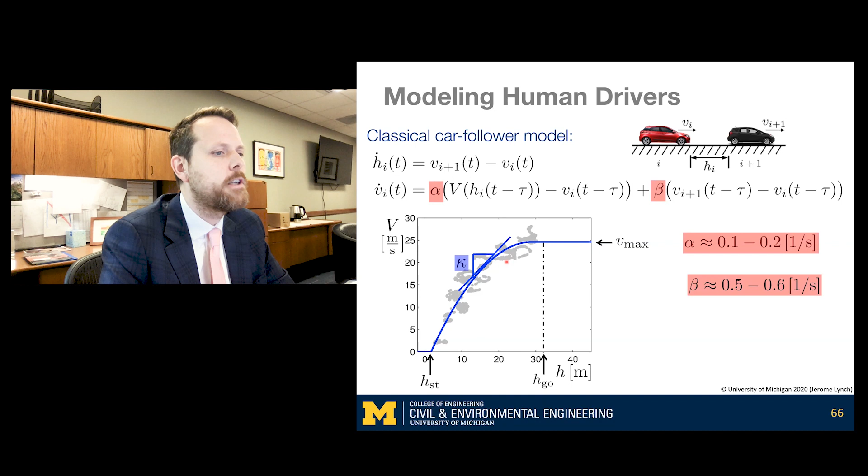This is critically important as we think about how human subjects, non-autonomous vehicles, are going to interact with autonomous vehicles. Autonomous vehicles have to be able to anticipate human behavior in non-autonomous vehicles, and that's what these models are informing. So we're empirically deriving these important model calibration characteristics, alpha, beta, and tau, the time delay or reaction time of the driver, based on empirical data collected from connectivity that we have today.

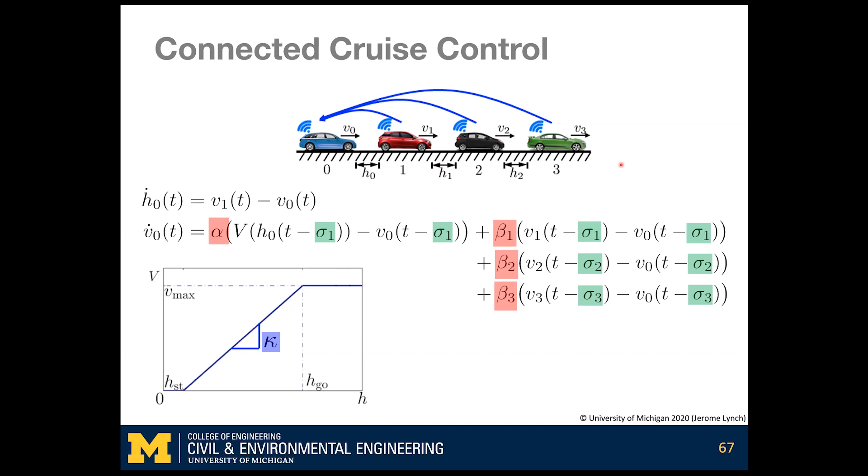That's informing models that then can be used, so if you have connectivity of human-driven cars, how that connectivity may actuate an autonomous car, car 0, based on non-autonomous vehicles 1, 2, and 3 that are ahead of it on the road network, based on estimated distances between these vehicles that we can collect from connectivity packets being beaconed by each of these connected vehicles.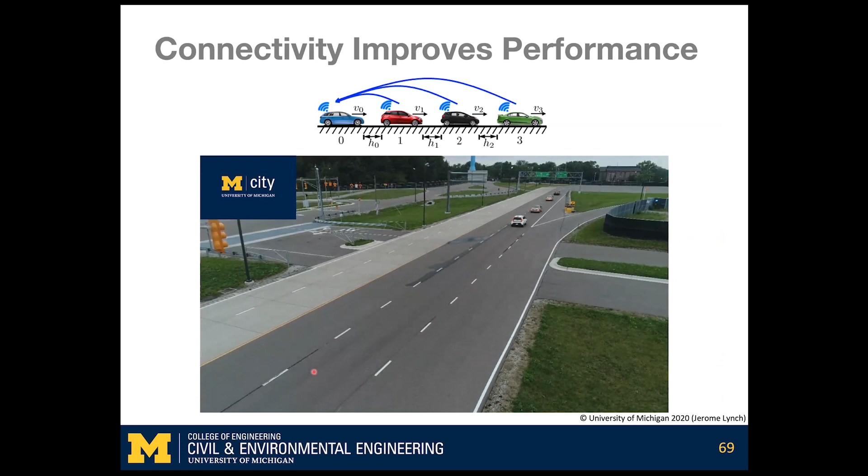So Professor Orosz has been looking at implementing control algorithms based on car follower models that define the behavior of human drivers ahead, but have connectivity to inform an autonomous car, car 0, to more gracefully brake and avoid collision. The implications of this are both for enhancing safety and understanding human behavior within dynamical models necessary to enhance the safety of autonomous cars.

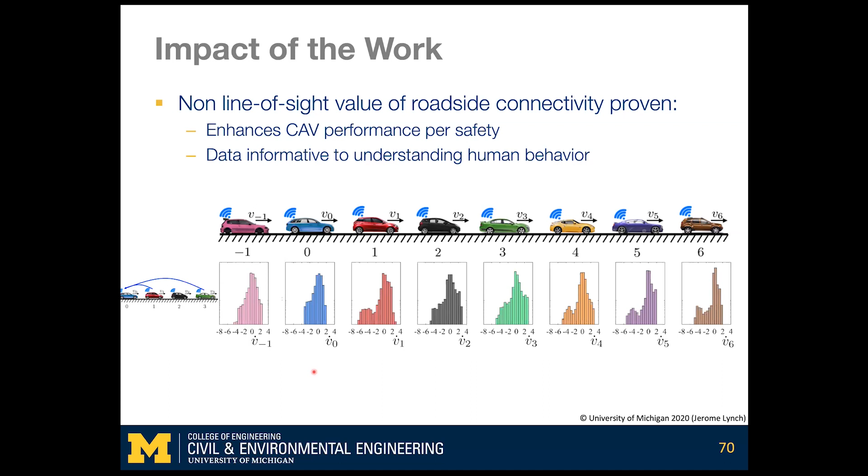But it's also powerful because it provides a way to quantify fuel savings associated with autonomy in vehicles. This is particularly important in the connected vehicle space with respect to trucks. There's a lot of interest in the trucking space for autonomy to enhance the fuel efficiency of on-road trucks used to move freight within our national and global supply chains.

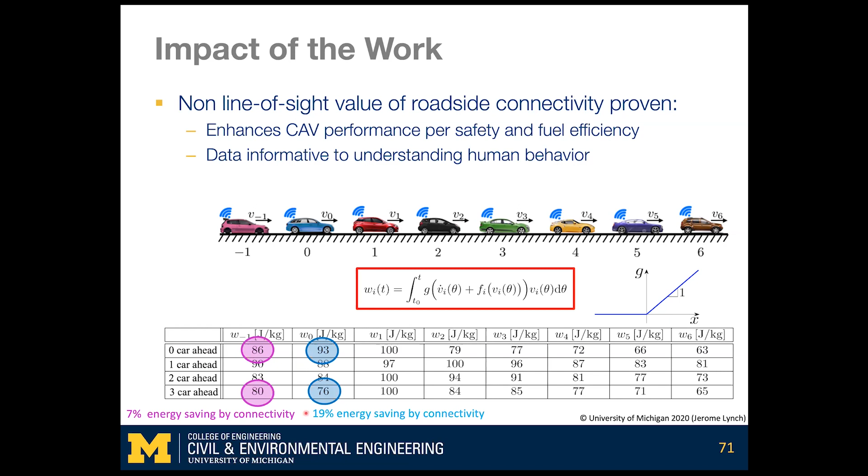Shown here on this table is the gains of work, or work saved, which translates directly into energy, on a per weight basis of the vehicle, when you consider connectivity between having no cars informing you ahead, representing the baseline work model, to having up to 3 cars ahead informing the autonomous vehicle. This results in 19% energy saving for the autonomous vehicle itself, but 7% energy saving for all the traffic that sits behind that particular vehicle.

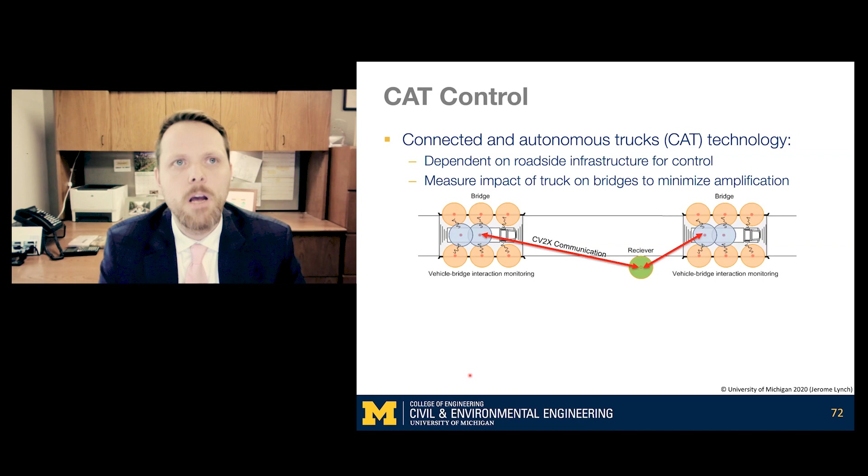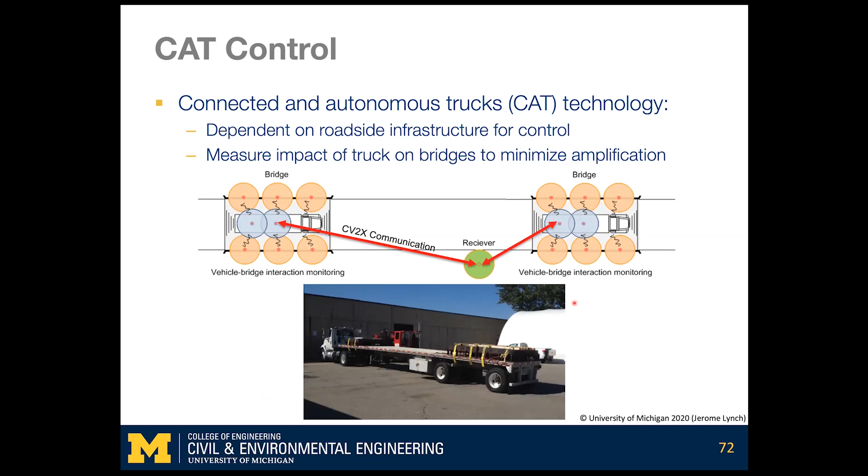We've more recently begun to expand this connected autonomous vehicle work by connecting trucks to our infrastructure. We can utilize connectivity to understand how trucks are moving on our roads and interacting with our bridges, which may be instrumented with monitoring systems. We're doing work right now in understanding how a truck may influence the behavior of one bridge to control the truck further downstream, minimizing the dynamic amplification impact that trucks have on our infrastructure. We're doing that with an instrumented truck here at the University of Michigan, and we're deploying this on our I-275 corridor.

In the remaining 10 minutes, I want to pull together the different cyber-physical system and autonomous infrastructure systems I just highlighted, the connected corridors, the connected stormwater systems, and connected vehicles, to frame it as an opportunity for new business for the civil engineering profession. Much of the thought leadership here at the university in this regard is being led by my colleague, Professor Peter Adriaens, director of our Center for Smart Infrastructure Financing.

This is problematic because we have cities, states, and even the federal government with increasing public deficits. We see increase in public debt relative to our gross domestic product, putting us in a weaker position to invest in infrastructure. We're also seeing the inability of the public sector to truly deliver efficient investment solutions to resolve some of these financing gaps. This is going to challenge the ability to deliver resilient infrastructure as well as sustainable or net zero infrastructure in the future.

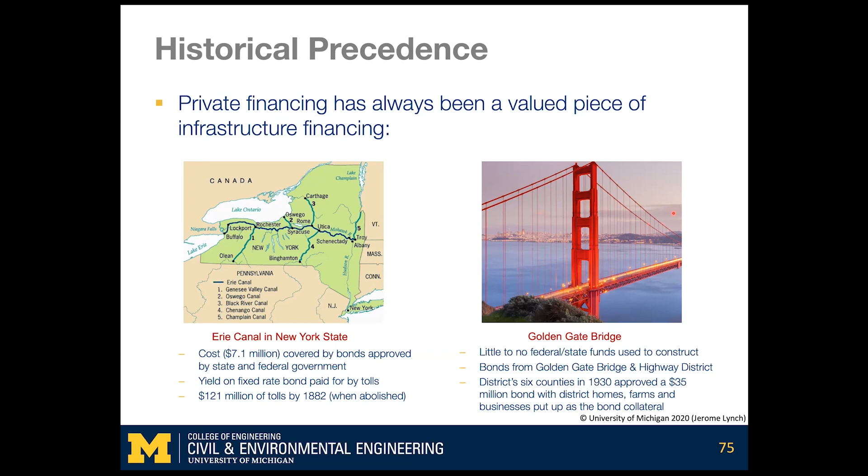More recently, we're seeing increasing roles of Wall Street within infrastructure, largely because investing in infrastructure has degrees of being recession-proof that you do not see in more commodity-based businesses. One innovative example is environmental impact bonds, a new type of performance-based bond that looks at infrastructure performance, with payoffs calibrated based on that performance.

One of the first environmental impact bonds here in the United States was a project undertaken by DC Water a few years ago, looking at storm overflow events within the Rock Creek area of the Washington, D.C. Water District. They were interested in deploying green infrastructure and adopted an environmental impact bond. Goldman Sachs and Calvert Foundation raised a $25 million fund in 2016.

It had a 30-year maturity date, paying off at a fixed interest rate of 3.43%. But it had a performance assessment 5 years into the bond, happening next year in 2021, looking at the effectiveness of that green infrastructure solution, with a one-time $3.3 million payoff, much like a swap, between DC Water and the investor community invested in that bond vehicle.

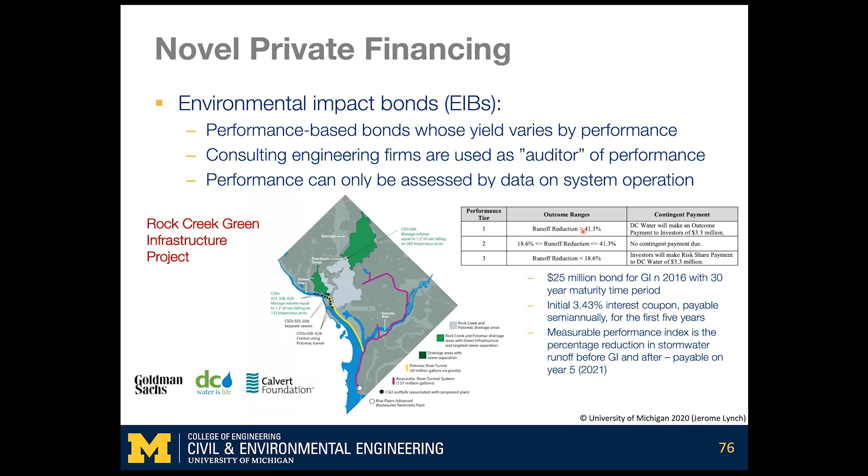If the performance of that green infrastructure is normal, no contingent payment is due in 5 years. But if the runoff reduction is greater than anticipated, DC Water will make an outcome payment to investors of $3.3 million. Vice versa, if the green infrastructure was a failure, the investors take that risk and pay DC Water $3.3 million, which can be reinvested to address combined sewer overflow issues within that catch basin.

This is an exciting opportunity for our field because consulting engineers are essentially going to be the auditors of performance, much like accounting firms serve as auditors of traditional investment vehicles. There's a role for civil engineers to be auditors of these performance-based financing vehicles.

With investment proliferating across the smart city space, we think there's a tremendous opportunity for civil engineering to be a leader in forming the appropriate way to explore these new financing mechanisms that can drive applications of autonomy within our infrastructure systems and deploy infrastructure services.

So we have the opportunity to unlock the value of data. We have the ability to provide unique insights to that data, and that allows the data itself to become a valuable asset of the infrastructure space. Not only is the physical asset valuable, but now the data it generates is equally valuable, if not more valuable, providing new business opportunities and new revenue streams for our profession.

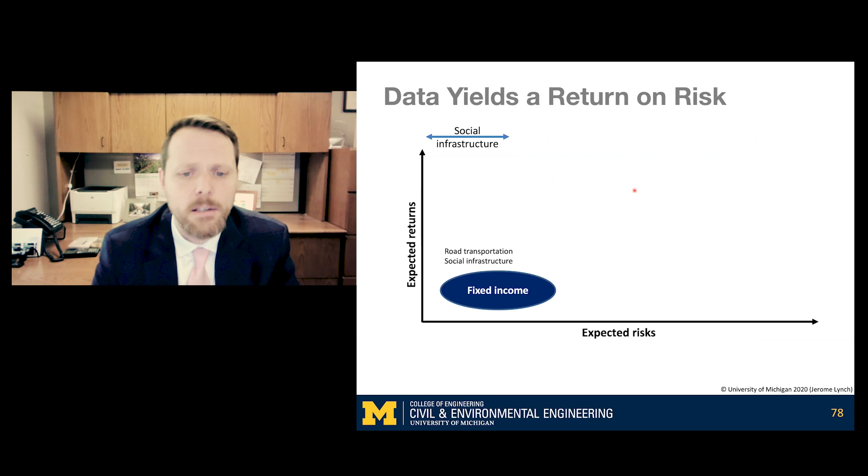There are many precedents for that in our infrastructure space. Our road and social infrastructure is often based on low risk but low return type fixed income investing, such as bonds. We have brownfield infrastructure that's more based on regulated infrastructure or utility grade infrastructure, much like our energy utilities as well as our ports and airports, essentially having higher returns but higher levels of risk associated with the operational efficiencies of that infrastructure. But debt and private equity are essentially emerging in the brownfield infrastructure as well as in the greenfield infrastructure, much like the DC Water example I provided before.

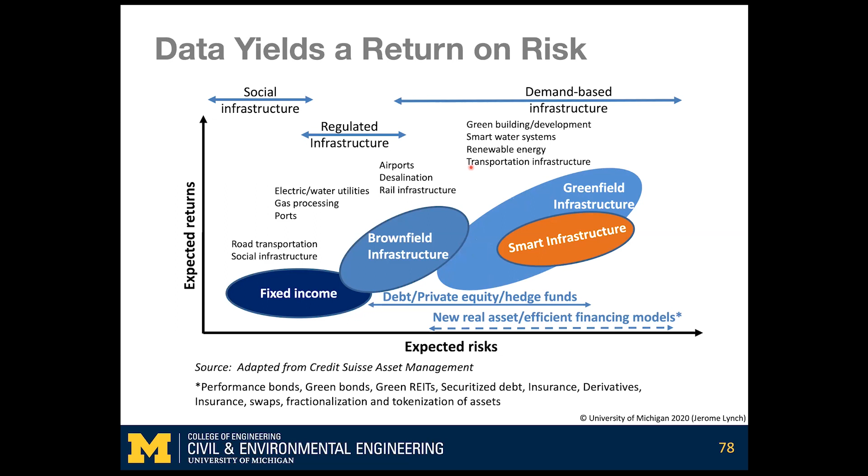Now, smart infrastructure squarely fits within this risk-reward framework, where we can see that there may be associated risk with the performance of our smart infrastructure, at least in the short term, but opportunity for the private finance community to derive higher levels of return associated with the performance of the infrastructure and our ability to monetize the data that we're collecting from our smart infrastructure.

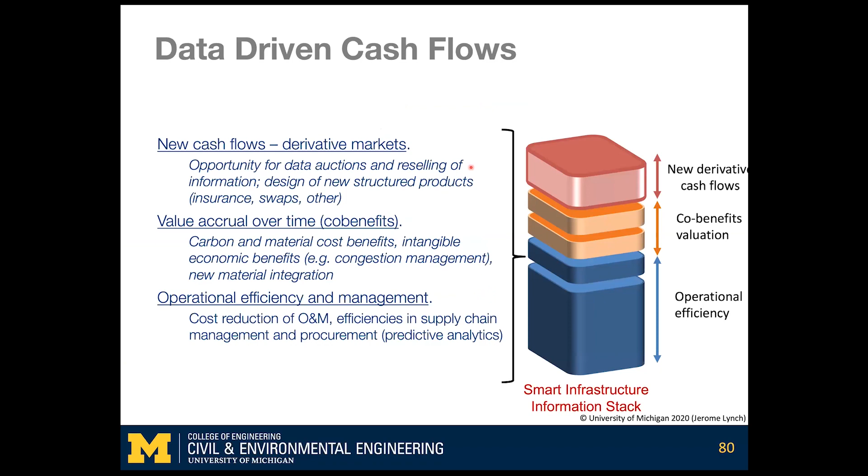So the question is about data and the role data is going to play as we think about financing infrastructure going forward. That can be data used to enhance operational efficiency, looking at instruments like environmental impact bonds or other performance-based bonds. Data can also be used to essentially have co-benefit valuations, looking at benefits that go beyond the benefit of the owner, and using financing to rectify benefits that are derived more widespread benefits by different stakeholders in our society.

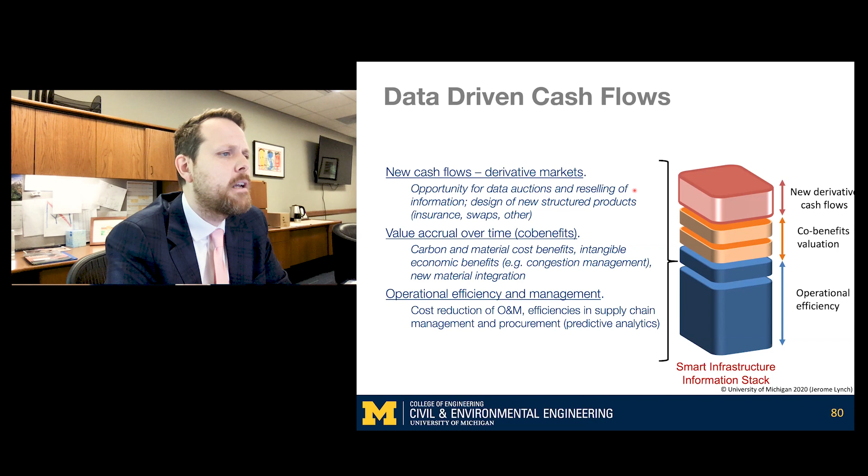And then also derivative cash flows that can be derived directly from our infrastructure and the assembly of different but synergistic data sets across a digitized built environment, providing opportunities for new insurance and swap vehicles that can bring new financing directly into our infrastructure space.

So just a few parting remarks. It's an absolutely exciting time to be in the field of civil engineering. The world needs us more than ever, while the technology that we have at our disposal is as empowering and exciting as ever before. And it's going to allow us to solve these large, grand challenges with the common good in mind. And that's a core attribute of our profession.

But we are a field in transition, which is a growing concern. And I'd be remiss not to raise the question: do we have a clear pathway to ensure our profession reaps the higher valuations automation is sure to offer, particularly as we think about infrastructure services and making that a mainstay of our professional identity?

Also, domain encroachment is something we must thoughtfully consider. We are a profession that's very proud of collaboration. We see tremendous value in collaboration, but at the same time, we don't want to cede leadership through collaboration, or not even being collaborative and just allowing leadership to dissipate based on others seizing opportunity that we're not seizing on.

And the last question, to me as an academic, is one that really is close to my heart and something that I'm very concerned about. Are we losing ground in recruiting highly talented students? If we do not begin to market ourselves professionally as the leaders in the space, I do worry that very bright and very talented students from a diversity of backgrounds are going to migrate to other professions and overlook our profession because of misconceptions about it being old-fashioned or not high-tech, which is absolutely incorrect given the type of technology endeavors we have today.

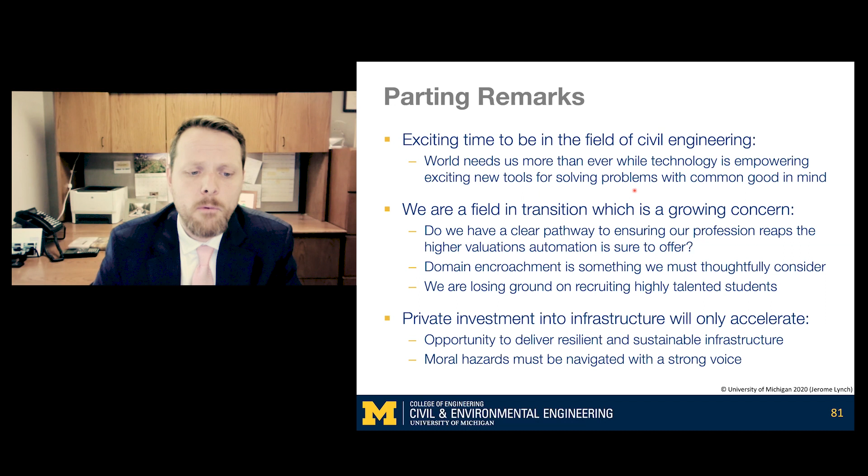Also, I think the private investment opportunities that financing brings is absolutely exciting. They can be used to accelerate the renewal of our infrastructure and the deployment of net zero infrastructure going forward. But there are moral hazards as a profession that we're going to have to navigate. And our society looks to us as a profession to really help it navigate some of those tough questions ahead.